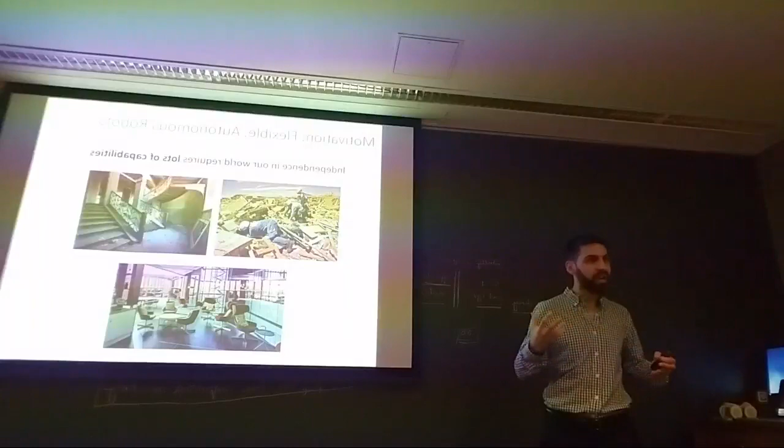My primary research interest is robotics, and one of the most challenging problems in robotics today is building robots that can really operate in the wild—outside of factories, outside of labs, in our wider world. Operating in our world requires a broad range of physical capabilities, whether we want robots to operate in a really messy scenario like disaster response, or even just navigating and traversing our complicated indoor environments.

In our homes. So most of my research focuses on modular reconfigurable robots. These are systems composed of repeated units that are themselves robots, called modules, that can connect together to form larger structures. By changing their connective structure, they can form different configurations with different capabilities. The idea is that these systems can be very, very flexible.

These systems have been studied since the early 90s, and a lot of existing work in this area has focused on establishing the fundamental capabilities that really differentiate these systems from traditional robots. We've seen lots of hardware systems capable of self-reconfiguration, actually changing into different forms. In terms of control, we've seen a lot of work in distributed algorithms for emergent behaviors from the inherently distributed clusters of modular robots, things like reconfiguration planning, and plenty of examples of these systems exhibiting interesting morphologies

and behaviors. But what we've really wanted for these systems since the very beginning is reactive autonomous reconfiguration in unknown environments—the idea that we could send a modular robot into an unknown environment and have it autonomously and automatically select the right body shape that it should take on and reconfigure to that shape in order to access the capabilities it needs to complete its task.

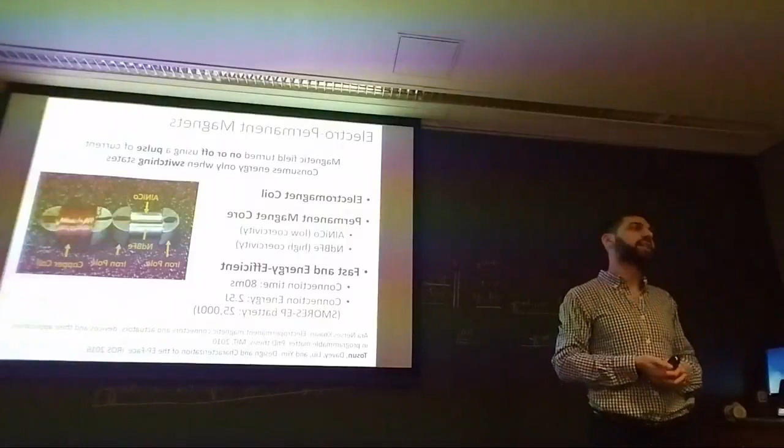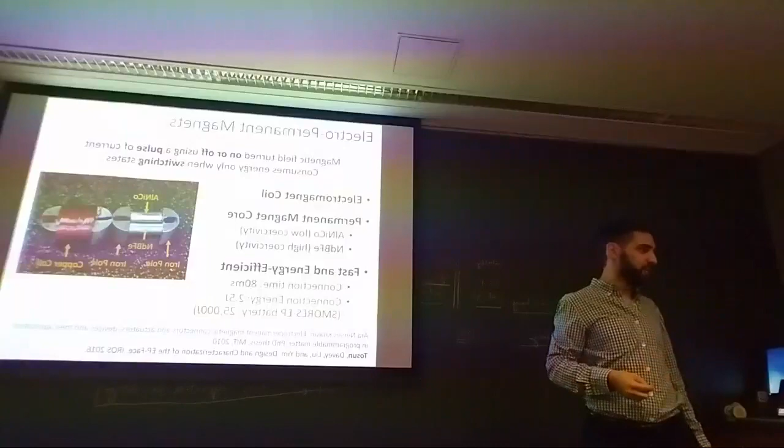Electropermanent magnets are solid-state magnetic devices whose magnetic field, and therefore force, can be turned on or off using a pulse of current. I'm passing around a couple magnets for you to handle, as well as an EP face. There are 2 components to these EP magnets: an electromagnet coil with a permanent magnet core.

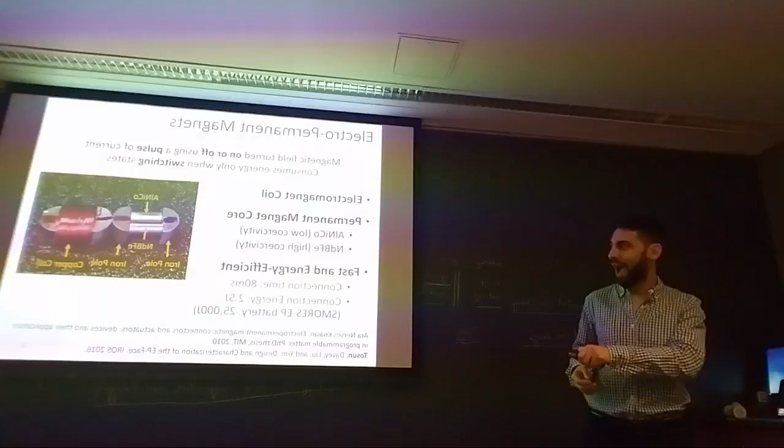This is the magnet before it's been wound, and this is after we've wound the coil around it. In the core, there are 2 kinds of permanent magnets: an Alnico rod magnet and a neodymium rod magnet.

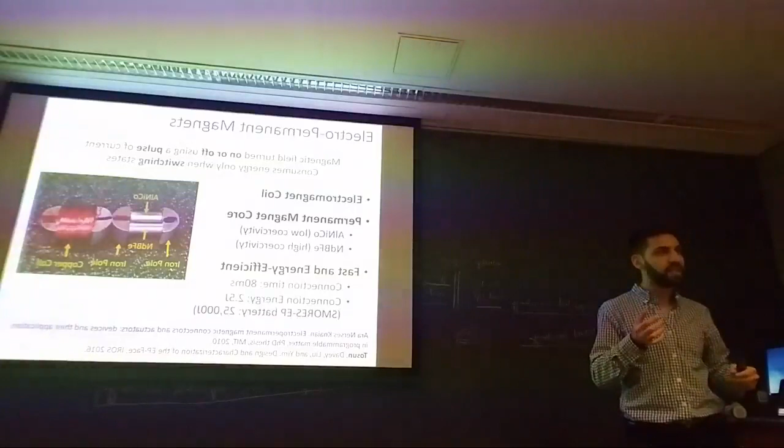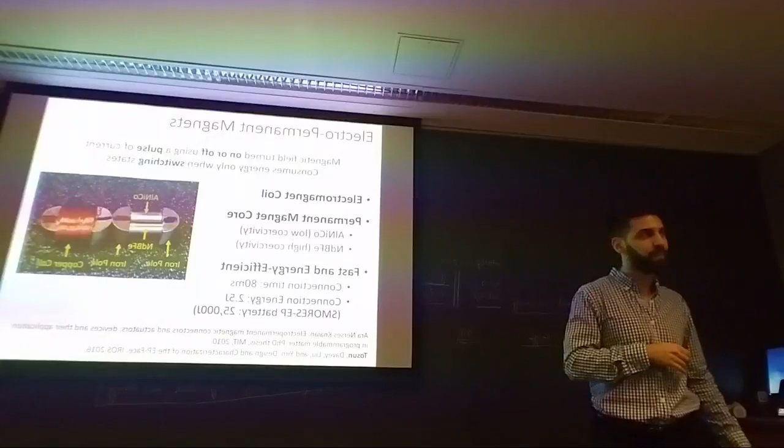When these rod magnets are magnetized fully, they have the same magnetic field strength, so they're the same strength of magnet. The difference is that Alnico magnets have a lower magnetic coercivity than neodymium. That means that in the presence of an external magnetic field, it's easier to get an Alnico magnet to repolarize, actually flip poles.

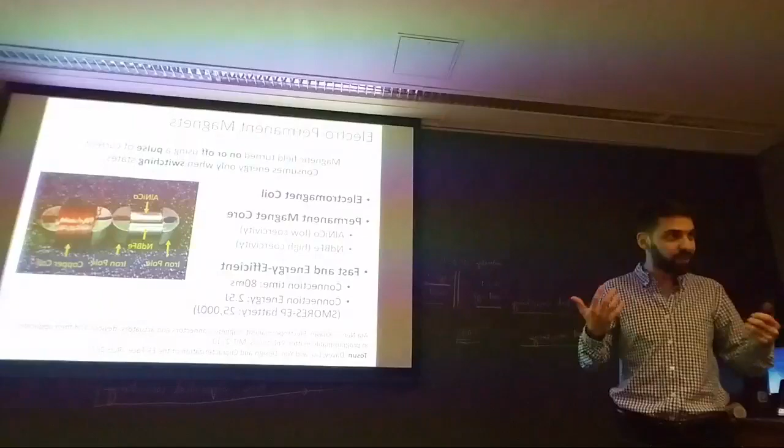So what we do is generate an external field using the electromagnet coil by pulsing a high current through it for a very short amount of time. That field is strong enough that it repolarizes the Alnico magnet, but leaves the neodymium magnet unaffected.

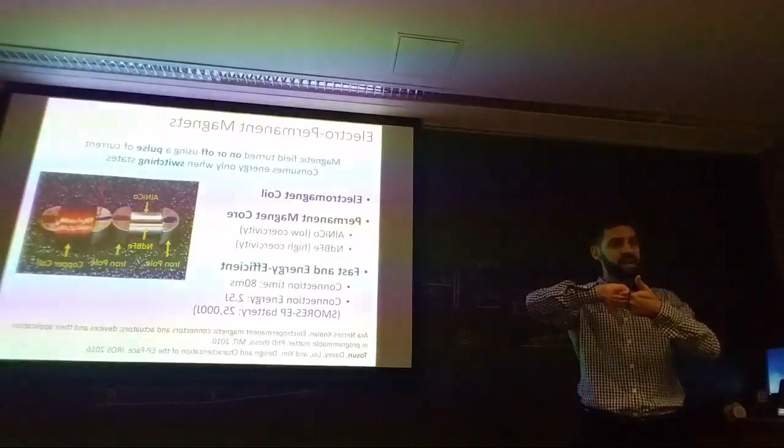So when the magnets are in phase, north-north, south-south, they act together basically as one magnet, and the force is turned on. When we repolarize the Alnico magnet so that it's out of phase with the neodymium magnet, they oppose each other and cancel each other out. So no magnetic field exits the EP magnet, and the magnetic force is turned off.

This is a really fast and energy efficient process, which is great if you're going to use this as a connector for a tiny robot with small batteries. The switching time for a single magnet is 20 milliseconds, and since we do them in series in each face, it takes 80 milliseconds to switch an entire face, requiring only 2.5 joules, which is 1/10,000th of the SMORES-EP battery life.

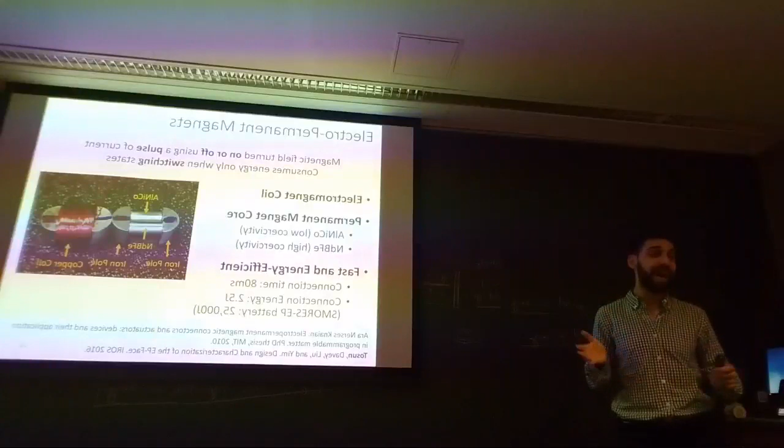So from the perspective of energy and time, we treat connection and disconnection for this robot as a basically free operation, which is really nice.

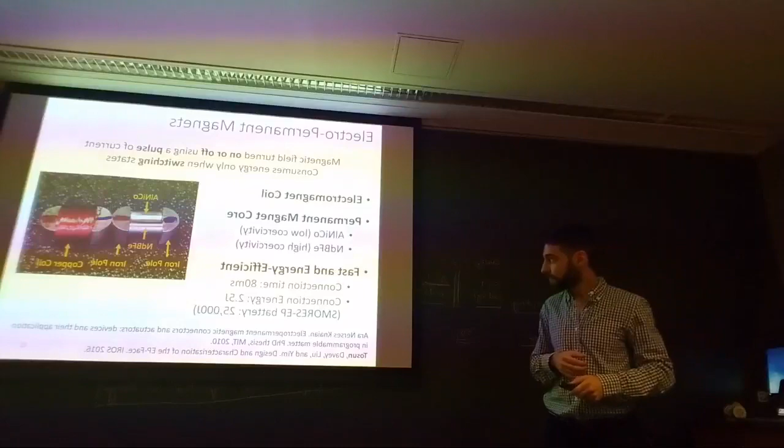Of course, we want the connection between modules to be strong. We do pretty well there with the EP face. We can support almost 90 newtons in tension on average. That's the weight of 20 modules if I was holding them straight up like this against gravity.

But actually a more important metric of performance in terms of strength for the robot is the characteristic strength. This is basically the number of modules the connector can support in cantilever, straight out against gravity like an arm. We can support 3.1 modules, and this is very important if we want to use the robot for tasks. It determines the workspace of an arm or leg we could form, and often the amount of work we can do on the environment in terms of lifting things.

Another really important metric is area of acceptance. This basically measures the tolerance to slop or uncertainty that the connector can operate under. The nice thing about using this kind of flat magnetic surface to connect is that it's actually very tolerant to disturbance.

So the modules will actually pull themselves together from a distance of 4 millimeters normal to the face, or 7 millimeters parallel to the face, and successfully connect. This kind of forgiving connection is really useful if you're trying to do autonomous reconfiguration of these robots with noisy sensing and potentially unknown environments, that kind of thing.

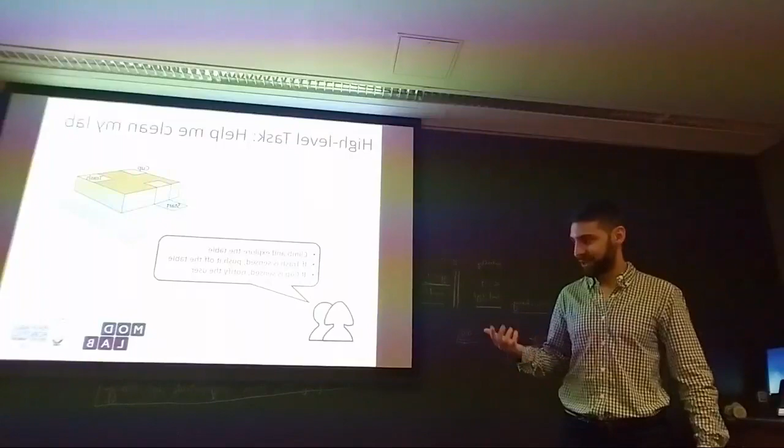This project is a collaboration with Professor Hadas Kress-Gazit's group at Cornell, including especially Gangyuan Jing, who's my co-author on the paper. We've developed a system that lets us do this with the robots. Our framework includes four components: a design and simulation tool, a library of robot designs, a high-level mission planner, and modular robot hardware. I'm going to touch on each of these briefly and then show you how they all connect to let us accomplish tasks.

Our design and simulation tool is called VSPARC. This tool was developed recently by Dr. Gangyuan Jing at Cornell — Jim, if you're watching, that's your shout out. This is a really great tool that lets us develop new configurations and behaviors for the robot that populate our library. Users can basically snap together modules, create behaviors, and simulate them.

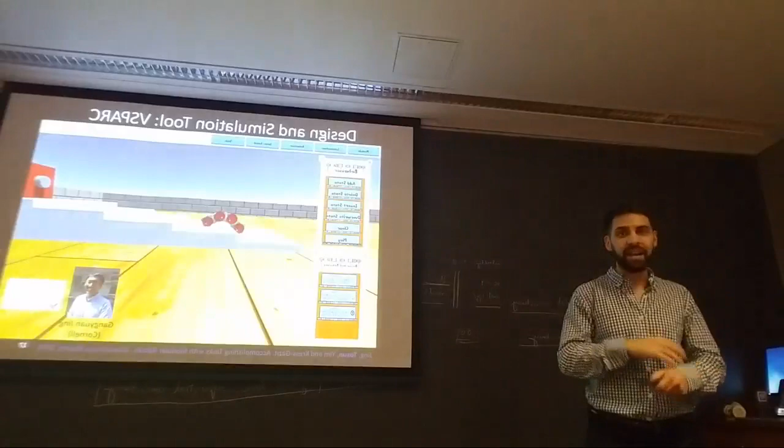Anything you do in the simulator can be saved to a server, which is then accessible by other people who use the simulator, and also becomes part of our design library. This tool is available at www.vsparc.org. It's free and available for any operating system. You can go start playing with it now if you're bored with my talk.

Using that simulator, we're able to populate our library of designs. This is a collection of configurations and behaviors that encodes the total functionality of the robot. Our library right now has about 50 configurations and on the order of 100 behaviors in it. A library entry consists of a configuration-behavior pair labeled with properties that describe the constraints of the environment under which it can operate, as well as the desired outcome of the behavior.

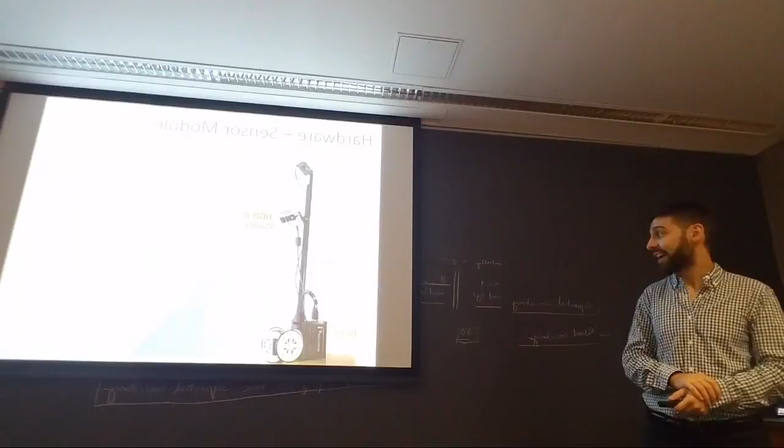Inside the body of the sensor module is a battery and a single board computer. We're using an Up Board. The battery provides about 45 minutes of runtime.

Our primary sensor is this RGBD camera, an Astra Pro camera, which is a great lightweight 3D sensor if you need one. This is doing the bulk of the sensing for our robot, getting point cloud data to do SLAM, object identification, as well as environment characterization.

But then also up at the top of this long stem is this webcam, which is small and light, and just looks down at a region right in front of the sensor module, a rectangle about 1 meter by 3/4 of a meter in dimensions. This actually provides localization for any module within this area that has an April tag marker on it. This is really nice—it's kind of like the robot is carrying its own little motion capture system with it. This is an innovation we developed to enable faster and more robust reconfiguration compared to a lot of past systems, because we've got really rich information about where the individual modules are within this area.

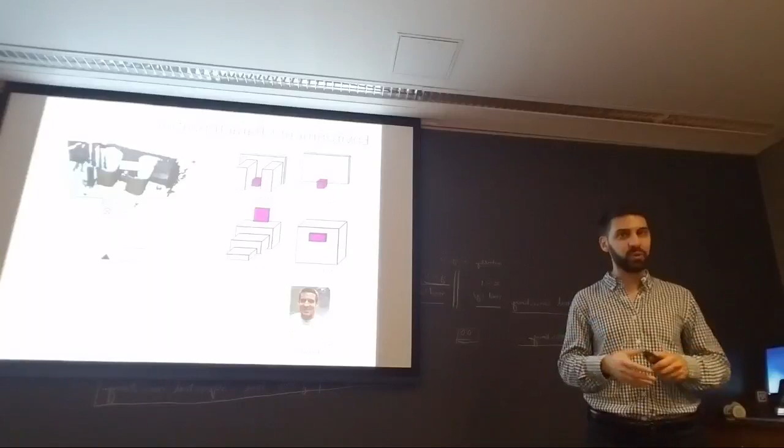So, of course, one of the most crucial factors in autonomy is the perception component. My collaborator, Dr. Jonathan Daudelin, has done a lot of great work to build the perception tools that we use in this system. We're doing SLAM, object identification, and navigation using a lot of off-the-shelf, open source tools in ROS. We're using some prior work of Jonathan's to do waypoint selection, a next-best-view algorithm.

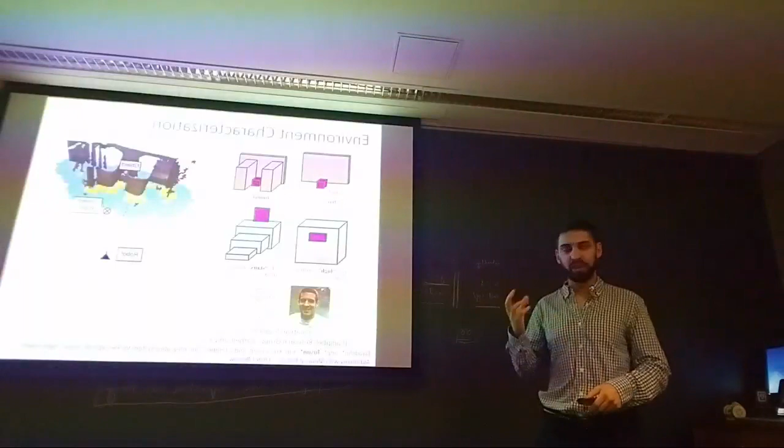And in order to actually extract environment properties from the 3D data the robot is sensing, for the high-level planner to make decisions, we're using classifiers that can distinguish between 4 different kinds of environments with 4 different properties: free, tunnel, high, and stairs environments. We're basically using voxelized templates here, and we're only distinguishing between 4 environments, but this could be expanded to more different kinds of properties, and if you wanted a more sophisticated classifier, you could plug in your favorite convolutional neural net here and everything should work just fine.

So in terms of high-level planning, we're using the same framework that I presented previously. There's just a couple of key differences I'd like to highlight. The first is that we're using a much smaller library in the experiments you're going to see here. That's because we were using this large library before—50 configurations, about 100 behaviors—which demonstrates that we can capture a broad range of functionality. But when we want to do things autonomously, the bar for robustness in terms of the behaviors we're doing is much higher.

So we ended up using a much smaller library with rigorously vetted configurations and behaviors that are more tolerant to disturbance and that kind of thing. Also, the task specifications for a lot of these tasks are pretty simple.

It's just a few, like 2 or 3 different statements that the user will provide. But what you'll see is that when the robot enters different environments and senses what's there, its behavior will change in some cases dramatically.

As it responds to what it's finding in order to complete the same task under different conditions. So in this first experiment, the robot's task is to explore this L-shaped office environment, find any brightly colored objects, and bring them to the drop-off zone. The drop-off zone is over here, and there are 2 brightly colored objects here that it's going to eventually find and pick up.

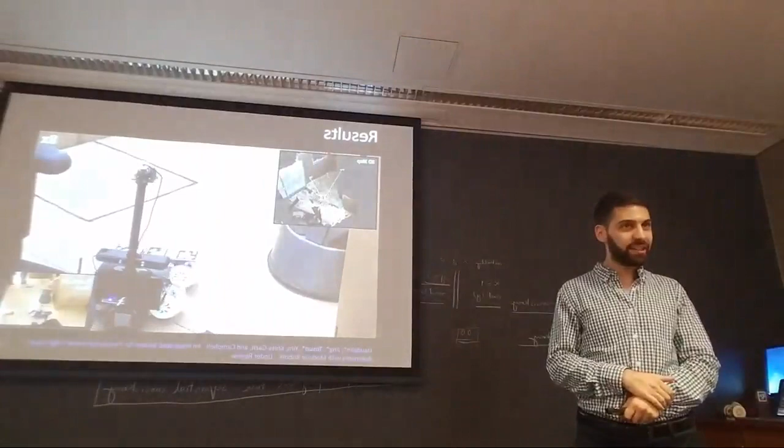The robot begins exploring without any prior knowledge of the environment. It's doing SLAM and characterizing what's around it, and it pretty quickly recognizes that there's this pink object over here, which it needs to retrieve.

Looking at the environment around this pink object, it sees that it's between 2 trash cans, so it's a narrow gap, and it correctly classifies this as a tunnel-type environment, recognizing that in its current configuration, this car, it's too wide to fit in there. It's not an appropriate configuration for this environment.

So it's going to choose to reconfigure to a different morphology that's got a long arm on the front that's suitable to reach in and grab this object in a tunnel environment.

You can see here this is the downward-facing webcam view. It's tracking these April tags, providing localization as the robot reconfigures.

After it retrieves the object, it's going to pull it back out and then reconfigure back into a car, which it needs to do in order to execute the required driving behavior to maneuver and bring this object to the drop-off zone.

In this example, was the decision to reassemble made autonomously, or was that pre-programmed? It was made autonomously.

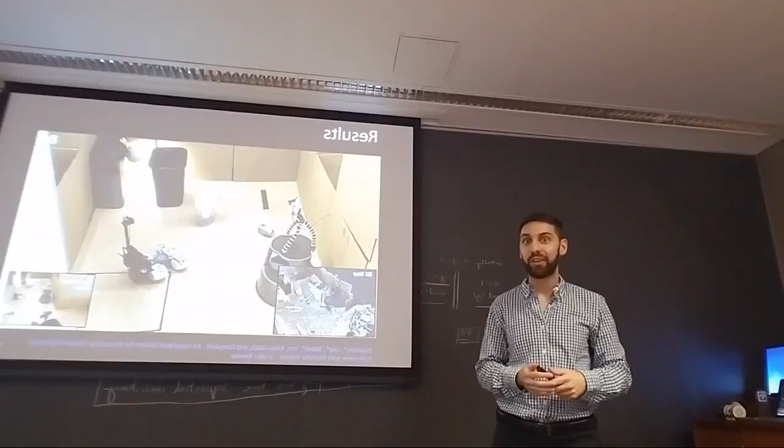If you really tried, you could probably get it to turn, but at least in the library it had access to, it was not labeled that it was able to turn.

In the process of picking up that first object, it also saw that there's this brightly colored green Sprite can over here in the corner, and it needs to go and retrieve this object as well. It sees that this Sprite can is in a free environment.

There's nothing around it. Of course, it got caught in the crack in the floor, so Jonathan had to reach down and free it, but pay no attention to the hand.

So in this case, the task specification is identical — it's not using anything about the color of the objects to make its decision. If the positions of the objects had been switched, the behaviors would have been the same. It knows that in this case, the object is out in the open, so it doesn't need to reconfigure in order to retrieve it; it can use this original car configuration.

Okay, so it has completed its mission. In these next two examples, the robot's going to help us mail this circuit board from Penn to Cornell. It's helping us with our collaboration.

So the task specification is pretty simple. It begins with an object in its possession, needs to explore until locating the drop-off zone marked in pink tape — in this case, it's a mailbox — and then needs to deposit the object there.

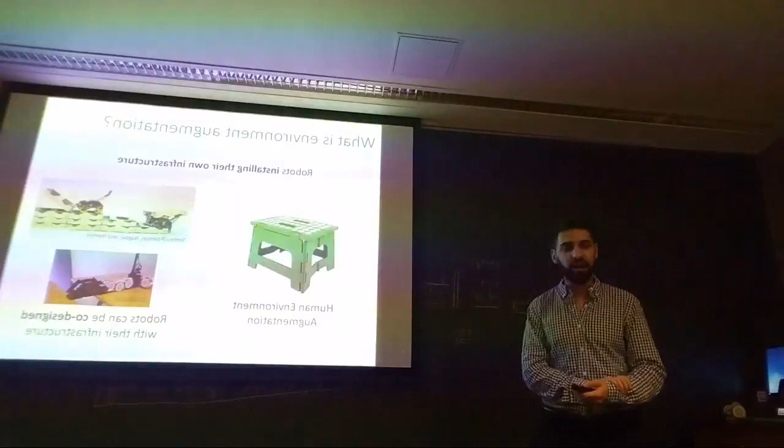If I need to reach an object on a high shelf, I could attempt the task dynamically by jumping, but that's a little dangerous. So instead, I'll usually go get a step stool and put it next to the shelf, changing the environment in a way that makes it work for my capabilities. I think this is an underexplored concept in robotics, and something that could be very exciting and powerful, because robots can actually be co-designed with the infrastructure they're installing.

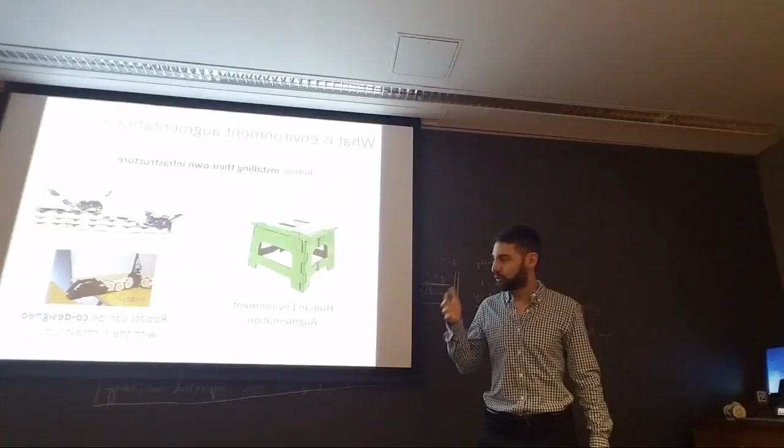We can make robots that are great at building things and also great at interacting with the things that they build. So I've started to explore this idea with SMORES-EP, my modular robots, by introducing what I call augmentation modules - building blocks that the robot can use to create ramps and bridges that let it surmount obstacles. It can create ramps and bridges of different sizes by using different numbers of building blocks.

These blocks are specially designed to be easily manipulable by SMORES-EP. They've got metal squares on them which let the robots latch to them with their magnets. They connect together using neodymium magnets and have rubber tracks and sidewalls that make it very easy for the robots to climb them without falling off.

In the work I'm going to show you - again a collaboration with Jing, Jonathan, Hadas, and Mark Campbell at Cornell - we're going to introduce this structure-building capability into our existing framework for high-level autonomy with modular robots, and show that not only can we achieve a functional advantage by doing this, but we can also integrate it into our planning framework in a pretty elegant way.

So you might ask, why do this with modular robots? Well, this actually addresses a pretty common scaling problem with modular robots. You might think a modular system would be very scalable - if you want to address a task on small length scales, you just use a few modules; if you need to travel large distances or over large obstacles, you make a big robot using lots of modules. Easy.

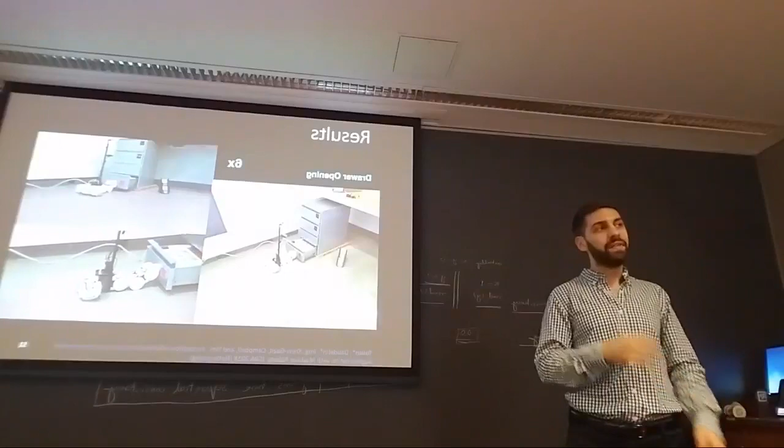Okay, that's a pretty simple task, but we can solve more complicated tasks as well. In this case, the robot knows that this thing is a set of drawers, because it's marked with this pink tape, which indicates that. Its task is to open the bottom two drawers and look inside to try to find some missing objects.

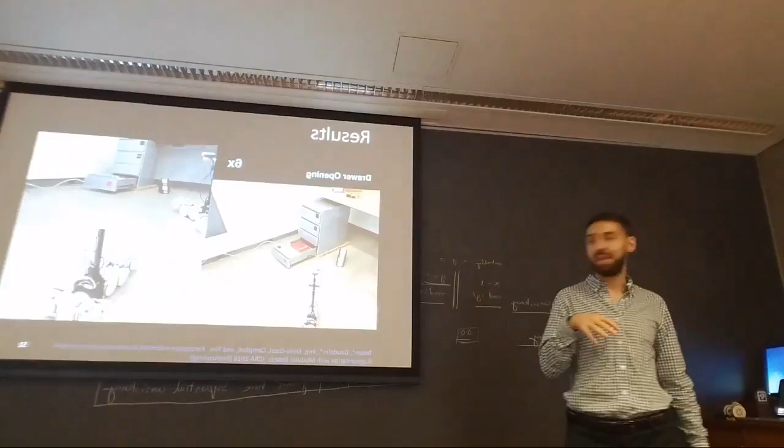Well, opening the bottom drawer is pretty easy. It latches to it with its magnets and pulls it out. But it sees that in order to open that second drawer, it needs to climb on top of the first drawer, which is full of books.

So this is a ledge of height 2, its environment characterization tools tell it that. It knows it can't climb it on its own, but it does know that if only it had a ramp of height 2 available to it, it could put it there and make its task feasible. And conveniently, someone has left a ramp of height 2 lying around next to the drawer, which makes the robot's life a little easier.

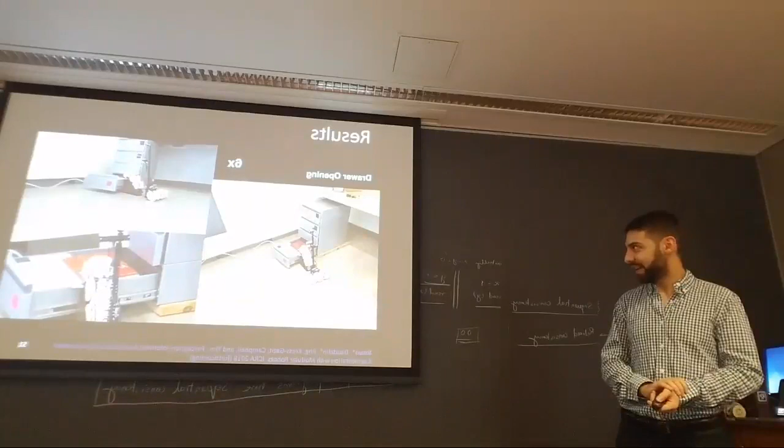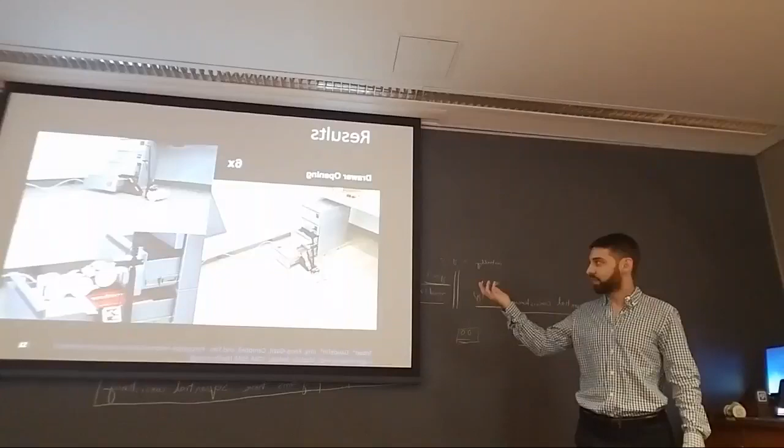So it's going to send these 3 modules up and open that second drawer to find the missing objects. This is actually being done reactively, not pre-scripted. It's a reactive task controller. If that drawer was empty—there's another video I won't show you where the first drawer was empty, so the robot could not climb on it. It knows that its mission is infeasible, and it gives up.

So we've seen that environment augmentation can be useful for tasks, and that we can integrate it into our existing planning framework, which is great. But the way we were selecting what structure to build was entirely discrete and library-based. We need individual library entries for individual structures. If you want to build a ramp of height 2, you need a classifier for that, and a library entry. Same thing for ramp of height 3, ramp of height 4, and so on.

A more scalable approach we might add to this system is: if we had some theory that allowed us to determine, given an environment, could we look at the properties of that environment and the traversal capabilities of a robot, and directly synthesize necessary structures from those constraints? That's actually what we've done in this work.

This is some theoretical work, a collaboration with Cindy as well as Colin McCloskey, a very talented undergrad from Yale who worked with me this summer. Specifically, the problem we're trying to solve is: given an environment, a robot, and a set of building blocks, can we find a min-cost set of structures—in other words, a structure that uses the fewest number of building blocks—that we could add to this environment to make the entire thing reachable by the robot, the entire environment accessible to the robot?

In our formulation, we represent the world as a height field, kind of 2.5D—an XY grid of cells with an associated Z height at every grid point. We represent the robot's capabilities in terms of a local traversability condition, which is basically a maximum local slope and maximum discontinuity the robot can successfully traverse. Using this traversability condition, we can look at the height field and turn it into a graph where nodes represent cells in the height field and edges represent valid transitions between cells that the robot could make.

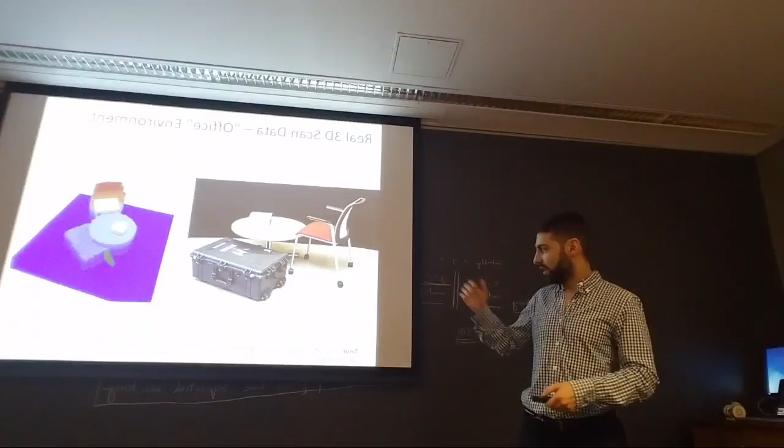We're able to do this using real data from real environments as well. Colin this summer helped me a lot gathering data and processing the 3D data to make it useful for our algorithm. So this is a scan of some objects that you might recognize if you work in Perch. This solution is found in about 1 minute, which includes all the data pre-processing time and that kind of thing. We see that by introducing these structures in this environment, it does make the whole thing accessible to SMORES.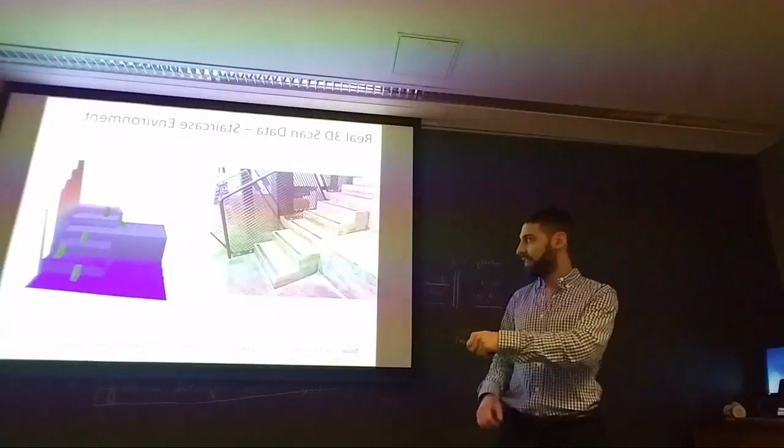All right, and we have another example. This is a staircase from the first floor of the Pennovation Center. The algorithm selects these 5 2-module high ramps to add to this environment to make it traversable. You'll notice that the placement of the ramps seems kind of haphazard, and that's because, with respect to the cost function the algorithm is using, the actual placement of the ramps doesn't matter. All it cares is that it's connecting the entire environment, right? So it's not taking robot path planning into account here.

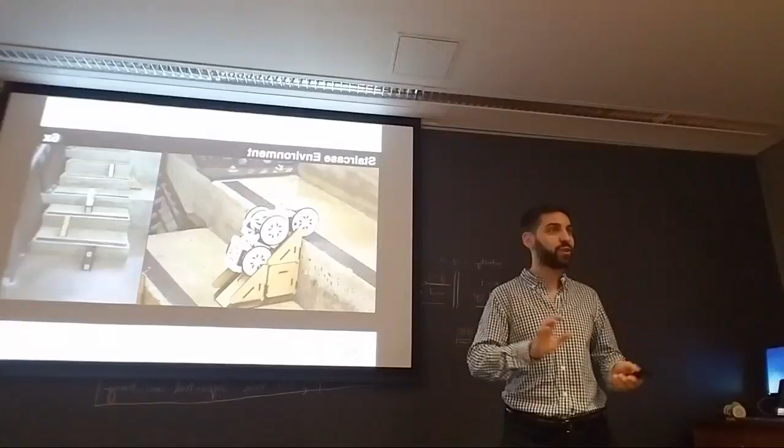Nevertheless, the robot is able to actually climb all of these ramps and reach every step. So in the future, we could perhaps take robot path planning into account here, and maybe post-process the actual positions of the structures in the environment to minimize path distance for the robot, that kind of thing.